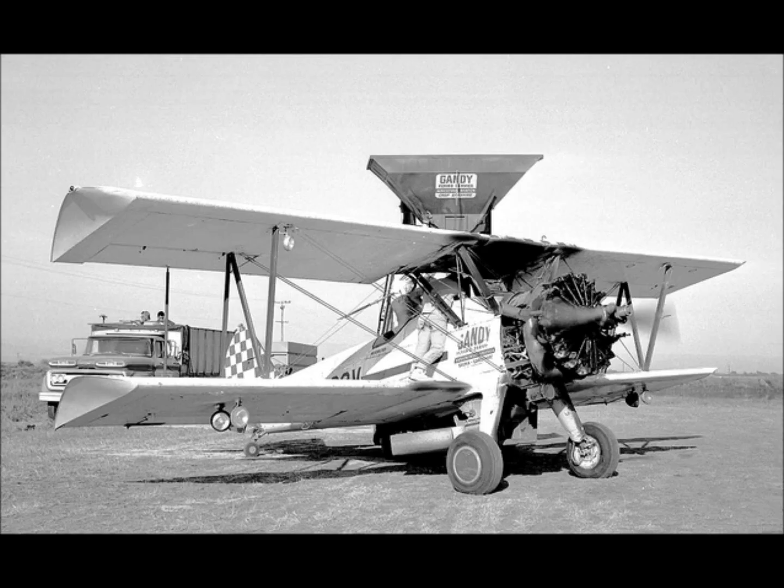Let me tell you more about the Ag-2 versus the first crop duster. The first crop duster was the Stearman, a biplane, a primary trainer in World War II. They were built by the thousands for the Navy and the Army, and at the end of World War II they were available for a small price—$1,000 you could buy one. And then they began to use the Stearman as an agricultural airplane.

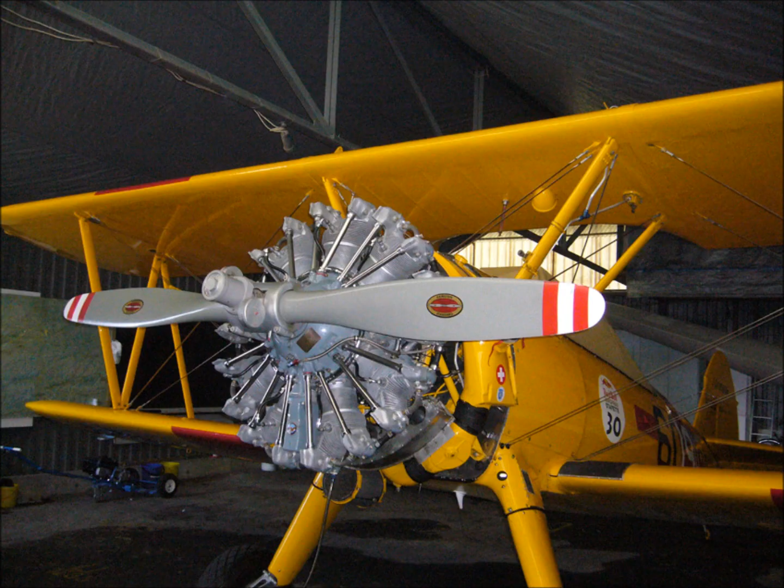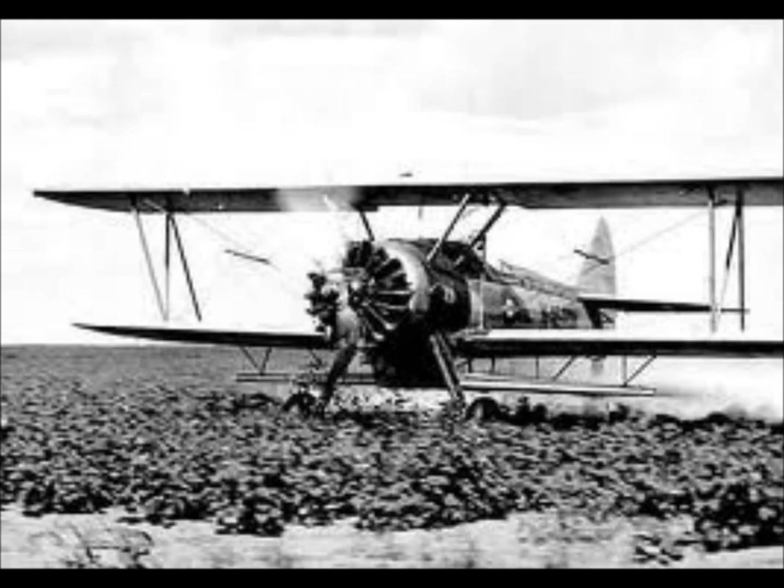They replaced the small engine with the Pratt & Whitney R985, which was used in the BT-13, another trainer in World War II. There were hundreds of these engines, so they got a cheap engine and a biplane that was acrobatic, and it was ideal for crop dusting, to start a crop dusting application company. But the Stearman was not designed for agriculture—it was designed as a primary trainer. So it was not the best, but it was the cheapest.

The Ag-2, on the other hand, was designed specifically for agriculture. And we can justify the different things that were selected in the primary design, because we were trying to come up with a product specifically useful for agriculture.

Now, the original work was done in Texas under Professor Weick, and they built an airplane called the AG-1. The AG-1 was an experimental airplane. It had the same platform and the same size as the Ag-2, of which I became a partial designer. The AG-1 performed very well, and the characteristics were as follows.

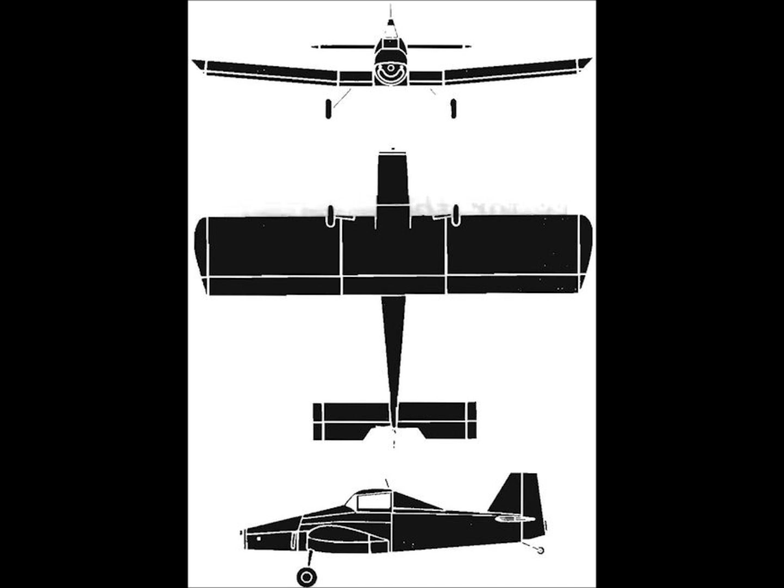By having a thick airfoil like the NACA 64021, you had a very smooth stall. That meant you didn't have a sharp stall like you have, for instance, in a primary trainer like the Stearman, which has an airfoil about 12% thick and would have a sharp stall. So the thick wing is better—you have better control during the stall. There are other reasons for having a wing like that.

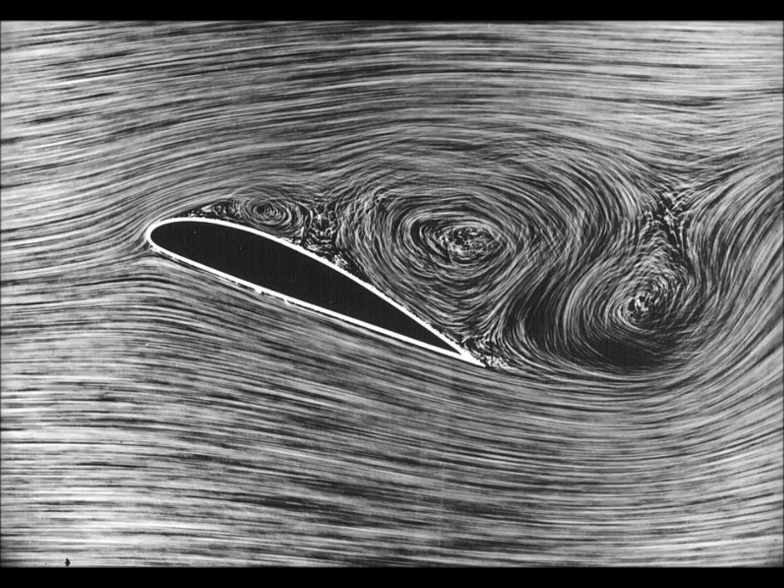I'd like to say some things about stalling. Most people have a technical reference on what a stall is, but I want to put it in my own words. A stall is an interruption of the airflow over the top of the wing, but it doesn't occur at the same time everywhere. In other words, if you have a rectangular wing, possibly the stall occurs by having an interruption of the airflow close to the root of the wing. If you have a trainer with a tapered wing—

Then the stall occurs where the ailerons are. You need the ailerons for lateral control of the airplane, which is not a good idea, so you have to put twist on the wing. Well, all those things come into play.

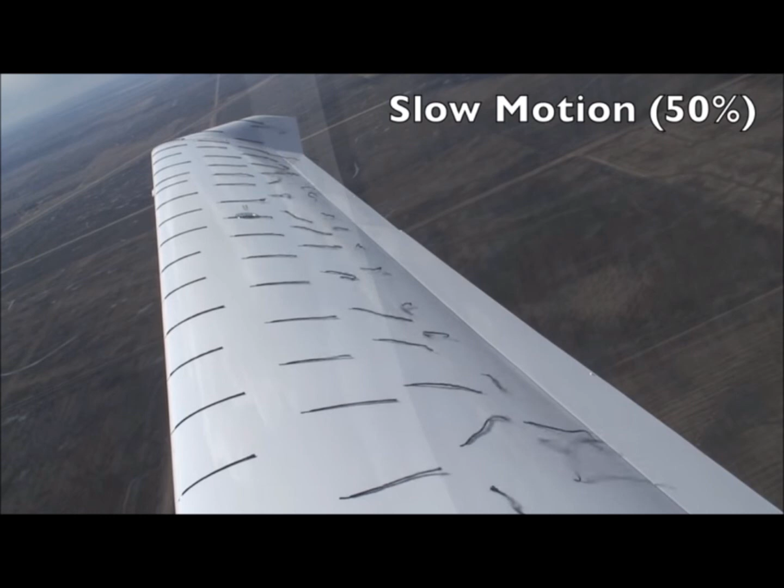If you want to design a crop duster and you're flying, say, 80 miles an hour, and you get to the end of the field and want to make a turn, you don't want to make a turn like you see at the airport, where the airplane banks slightly and makes a turn. What you want to do is make a very sharp turn with the airplane half stalled, and come back pretty close in line with where you started from. That's called the crop duster turn, and it's dangerous, but at the same time it saves time.

And the agricultural pilots get good at it. The Stearman is an acrobatic airplane, so it can take it. And the Stearman has a light wing loading, so it works out okay.

Now, that's a fact. The Ag-2 is primarily designed to make a turn in the stall, in the semi-stall condition, where the flow gets interrupted, with an airfoil that is gentle, so you don't have a very sharp drop in the lift. It had slots and other devices for good lateral control, like spoilers. You could make a very safe crop duster turn with a bigger airplane.

Well, that's essentially the story of the Ag-2. It was bigger than the Stearman. Roughly it goes as follows: the Stearman was an airplane designed with an engine of about 300 horsepower. Later on, they put the R985 on it because they were able to get it cheap from the basic trainers, the BT-13. That was about the maximum size engine you could put on a Stearman airframe. A bigger engine, and you had trouble.

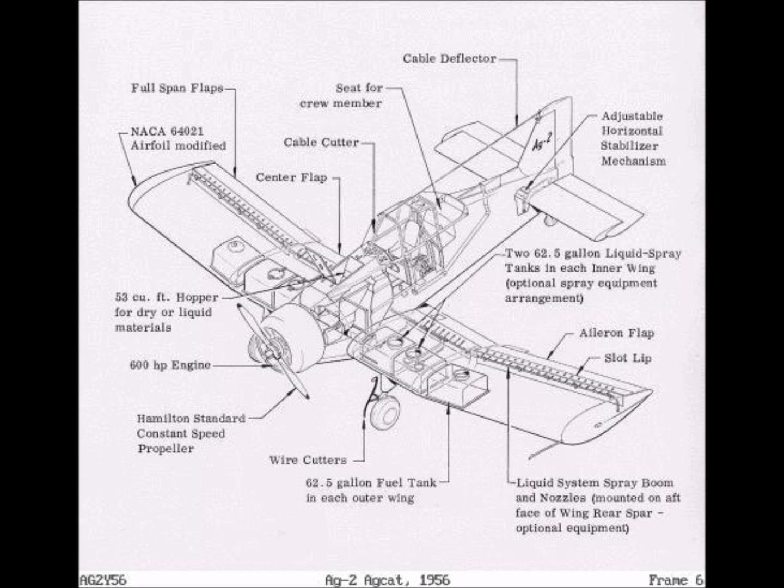The Ag-2, on the other hand, we were able to put a bigger engine on, the R985, the 450. We went to the R1340 that came from the T6 Texan, and it was double the capacity. It had a gross weight of 6,000 pounds, so it could carry more payload, more fertilizer, and that made it more efficient because you wouldn't have to be loading it so often.

That's the first thing. Also, the wing loading on the Ag-2 was greater than on the Stearman, which meant there was more downwash, more penetration of the grain or liquid fertilizer into the ground. So all those things versus very good control through a stall turn.

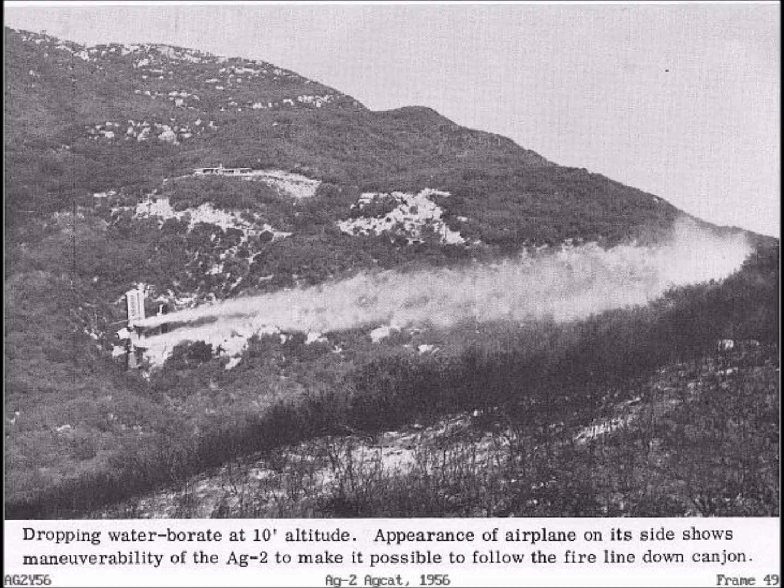Now, remember, I said that wings don't stall all at once. When you say a wing is stalled, it's because there are portions of the airflow on the top of the wing where the flow separates. So in the Ag-2, on a stall turn, the wing wouldn't be stalled everywhere, so you would have good control and you could make a crop duster turn.

What else? The history of the plane as it was being developed and the economics. Okay, the key thing, now I'm going to talk about the money situation. I would like to tell you that when I started working on the Ag-2, I was just an engineer right out of school, and I didn't know anything about agricultural aviation. But working with George Wing, the Transland Company, and the many years I was there, I learned a lot. Now, this is what I learned.

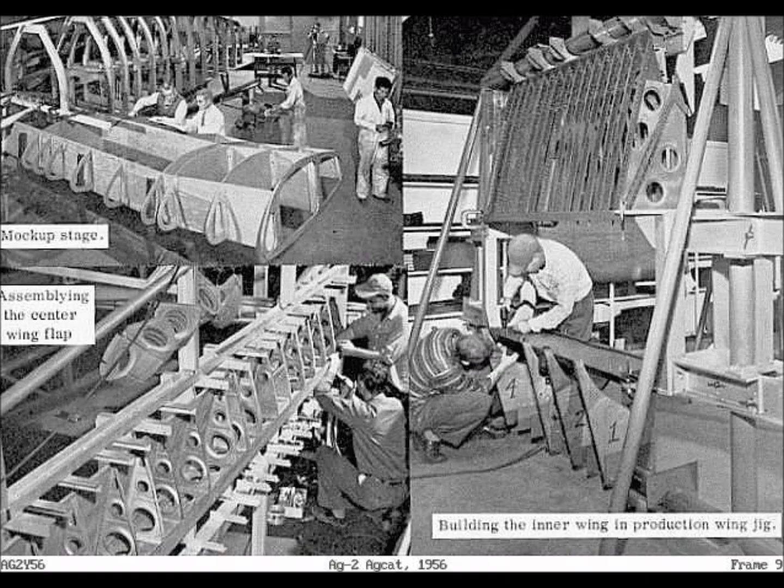At the end of World War II, there was a shortage of food in many places around the world. For the first time, people began to use fertilizer and apply it with airplanes, because airplanes became cheap by adopting basic trainers from World War II, modifying and changing them, all kinds of airplanes. They began to use them for agriculture, and they began to use DDT, and the production of food increased.

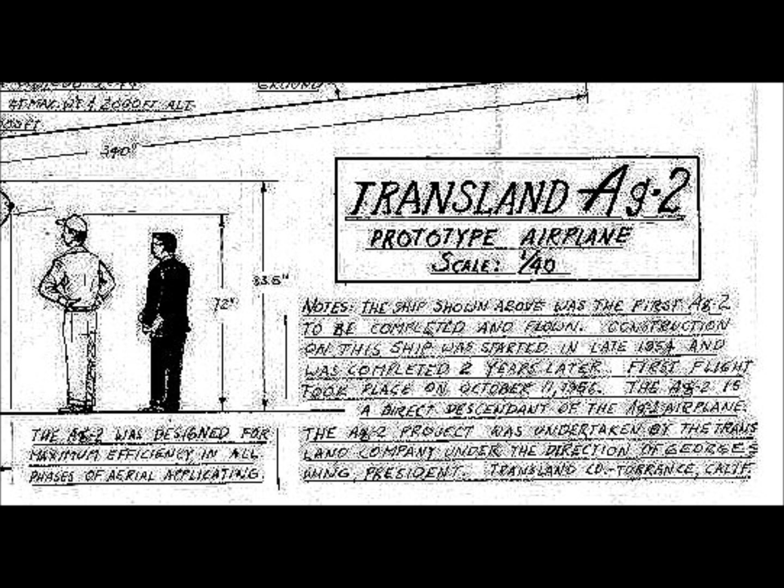I'll give you an example. In 1949, when I immigrated to the United States as a foreign student, Mexico didn't produce enough food to feed itself. Actually, at the end of World War II, that's the way conditions were - Mexico imported food. By the middle of the 1950s, the agricultural production of Mexico was four times as much, and it was exporting food, all because they began to use fertilizers and airplanes.

And so it was all around the world. As a matter of fact, when we started designing the Ag-2, it looked like we were going to sell many, many of those airplanes. Remember, the Ag-2 was started about 1954, and it began to fly for the first time in '56. DDT and agricultural aviation was expanding at full swing.

What else can I say about that? Later on, people found out that DDT had unfavorable effects, and that put a big crunch on the expansion of the industry, and the Ag-2 just came too late. What else?

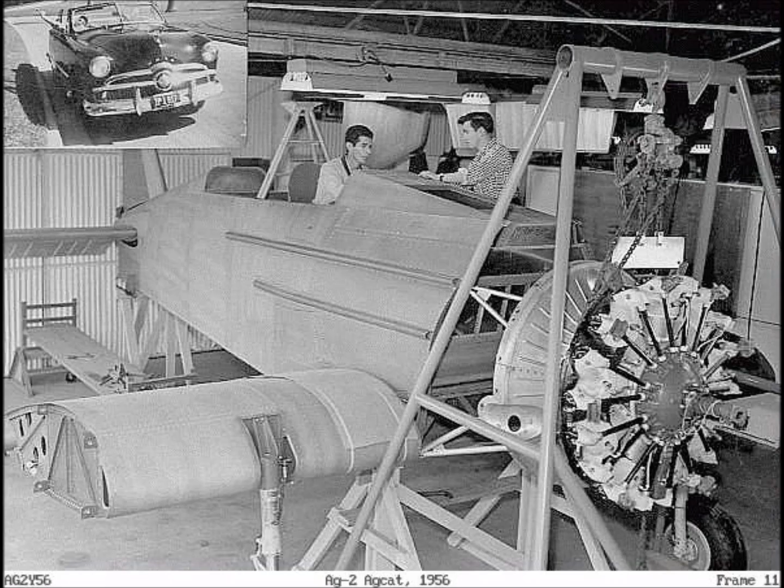Did you mention why it had a bigger engine? Oh well, the engine is an important aspect. You need it to make a good agricultural airplane. You don't want a very fast airplane. You want essentially a slow airplane, very forgiving, and you want good control in turns so that you can make that crop duster sharp turn where the wing is half stalled.

The key thing is that you want an airplane that is aerobatic, that can take the G's on a turn. You want an airplane that is not very fast, so you want a light wing loading. You don't want a wing loading of 30 or 40 pounds per square foot. You want something like about 15 or 20, of that order.

I think the Ag-2 was a heavier airplane, with a wing of 321 square feet and a weight of 6,000 pounds. You take 6,000 divided by that, it was about 20 pounds per square foot, which was heavy for a crop duster.

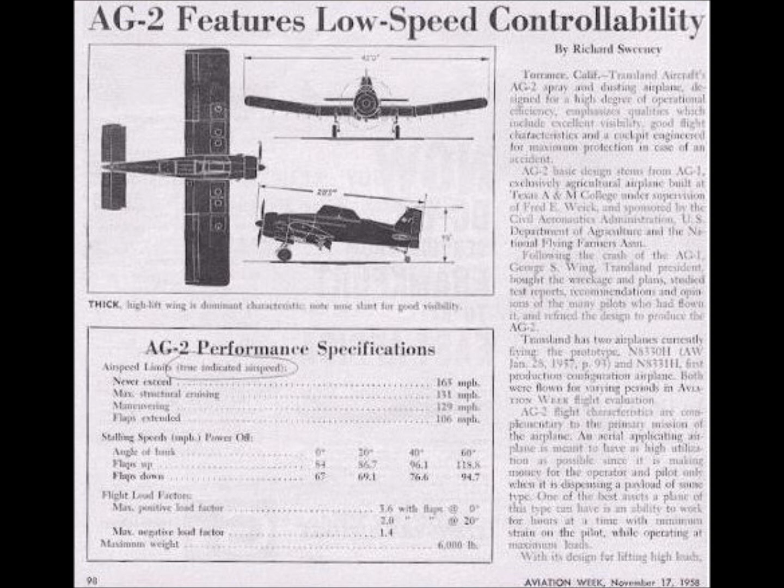About the engine, the engine of choice in the beginning were small horsepower engines. The crop duster of choice was the Stearman. The Stearman came up with the Jacobs, or an equivalent engine of about 300 horsepower, 320, 350, something like that.

When they started using it as a crop duster, you make more money, you carry more payload. So they went to a bigger engine, and the Pratt & Whitney R985 became available. Those engines came from the BT-13 primary trainers, and they were very cheap. The marriage of the R985 with the Stearman is what made the Stearman an ideal crop duster. It was cheap, it had enough power, it didn't stall, it had good characteristics doing the stall, and it fulfilled the slot very well.

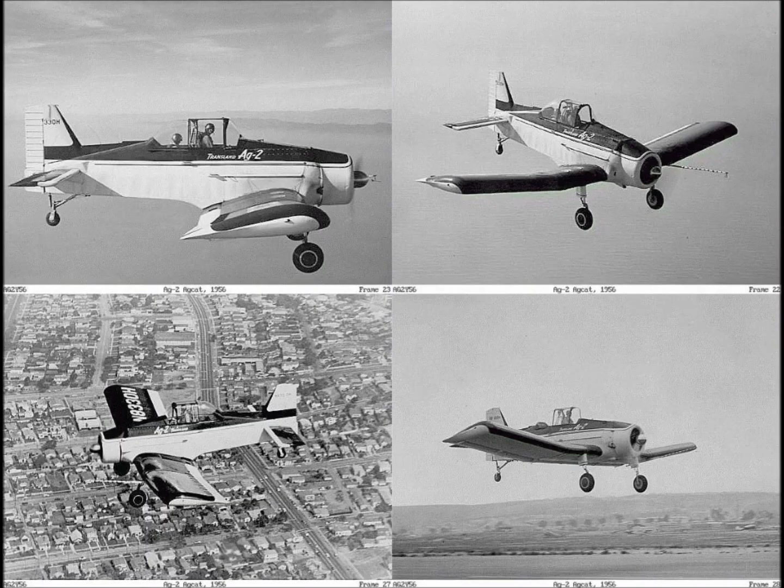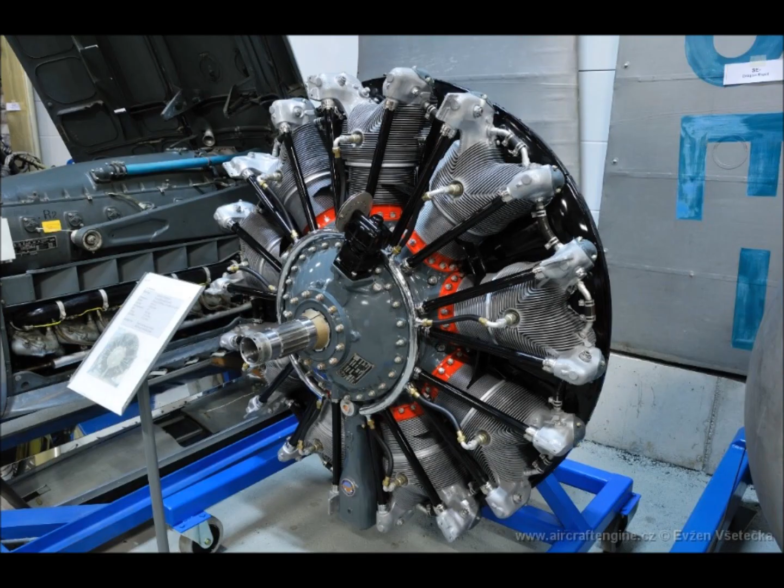Later on, when we were designing the Ag-2, from the Ag-1, we went to the R985, the engine of choice. But then the engines became more scarce because more crop dusting pilots were using the R985, the 450 horsepower engine. So we went to the R1340, the 600 horsepower engine. They were cheaper than the R985, and it made the Ag-2 perform much better.

Now, if you go into bigger engines, you have to go to much faster airplanes, and then they're not suitable for crop dusting. Could you put an R1340 on a Stearman? No, no way, it'll tear it apart. That's 600 horsepower - 450 was the maximum. You put a bigger engine, and you can't even land it. I'm sure some pilots tried it, but that's a big, heavy engine.

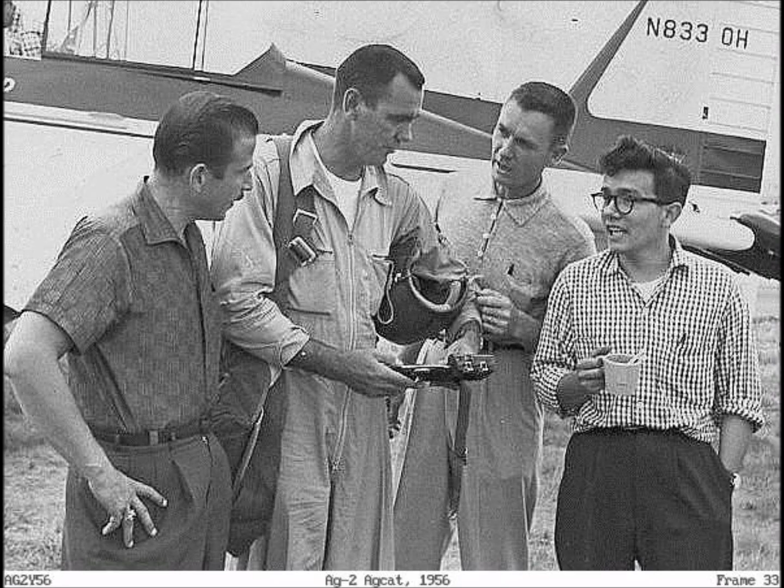Okay, I was going to ask, did you want to talk about George Wing?

Well, if you ask me, the interesting thing about it is the different people that work in agricultural aviation. I don't know all of them. I know only the ones that worked with the George Wing company, the Transland company. I could talk about George Wing.

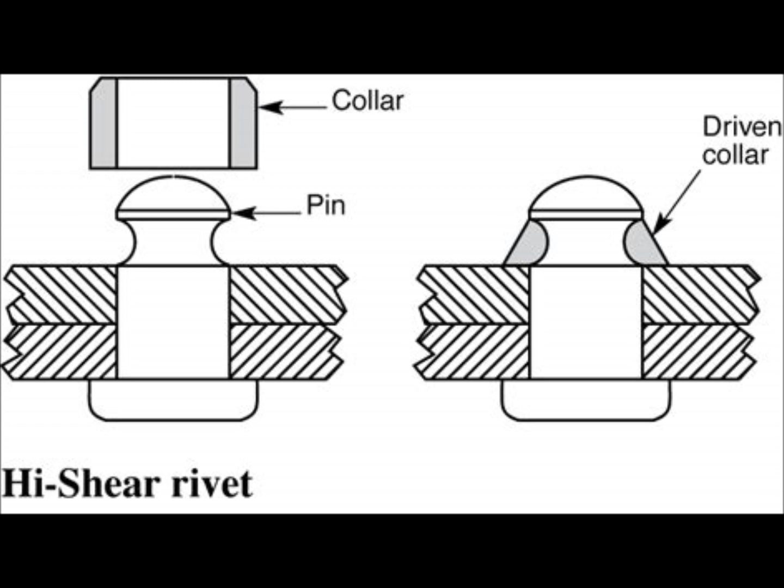George Wing started at North American as an engineer. He invented the Hi-Shear rivet, which I'll explain on another occasion. The high shear rivet became the primary choice rivet for highly stressed parts in airplanes during World War II, and that's what put George in business building high shear rivets for North American and then for the whole industry. That was the base, that was the money maker.

George Wing always wanted to be an airplane designer. That was his ideal, and he wanted to get into aviation. That's the way he got into agricultural aviation.

One branch of the Hi-Shear Corporation was the Transland Company, which specialized in all kinds of accessories for agricultural aviation - for Stearmans. Everything from the hoppers to carry solids to the liquid delivery systems and so on for the Stearmans were built by the Transland Corporation.

The Transland Corporation became the company that sponsored the building of the Ag-2 under George Wing's direction. He wanted to be an airplane designer like Donald Douglas or some of the other people. So he bought the rights to build the Ag-1 from Fred Weick at Texas A&M. That was the prototype of the Ag-2, an airplane designed for agricultural aviation in an agricultural college in the United States. And it was a terrific airplane.

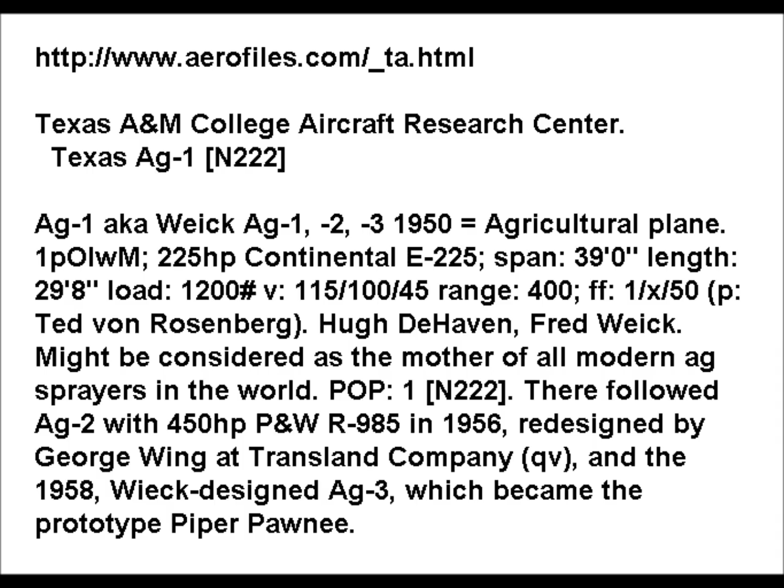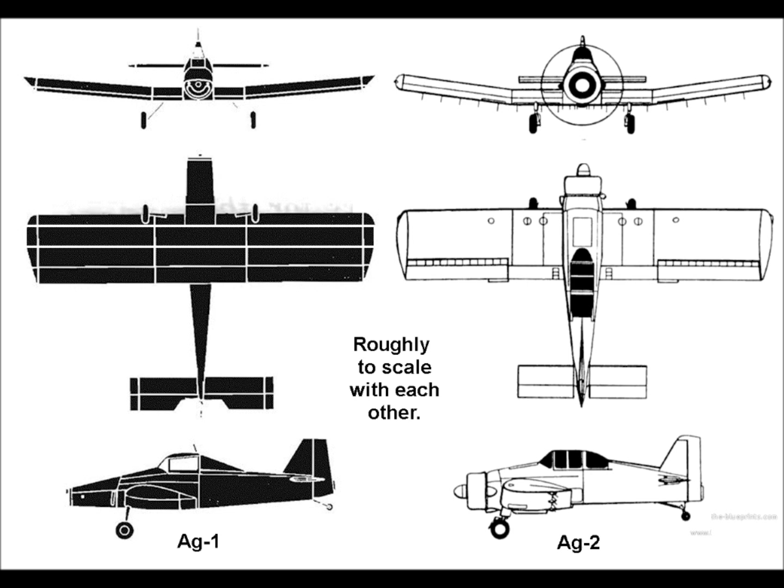How much did the AG-1 and AG-2 share in terms of engineering? Aerodynamics, 100%. But from the construction and stress analysis, everything else was different. The AG-2 was a bigger airplane, and it was certified by the FAA, which had requirements for regular airplanes. The AG-1 was an experimental airplane, never put into production. We built the AG-2 so we could manufacture thousands of them.

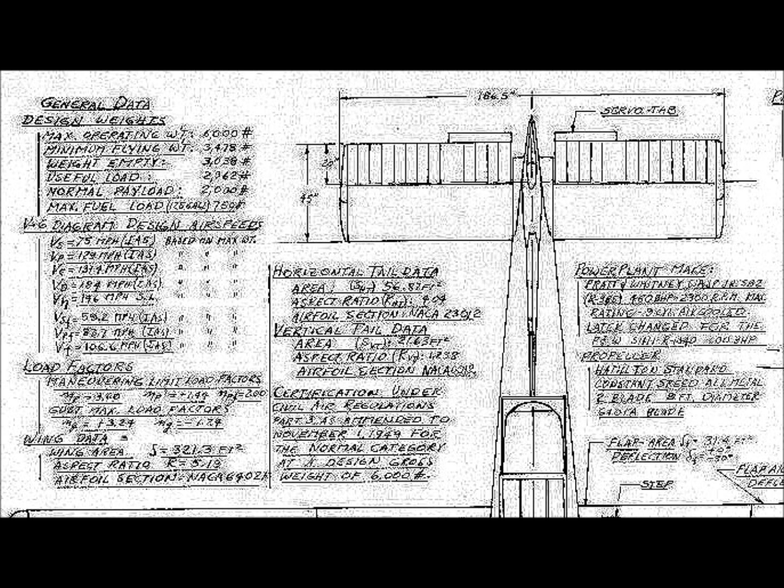When you did the AG-2 as a prototype, what did you estimate its cost of production was in the 1950s? I was not in the loop on pricing, but building one of the prototypes probably cost $250,000. Just the engineering cost over the 4 years it took to build the AG-2, we spent about 20,000 man hours. I was an engineer myself, and I estimate I put about 4,000 man hours on that airplane. So it was expensive. The predicted price for the AG-2 was about $50,000.

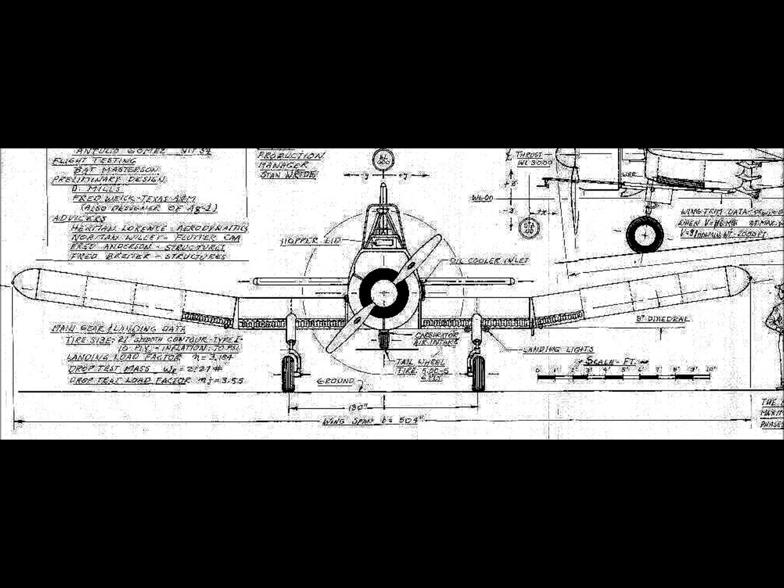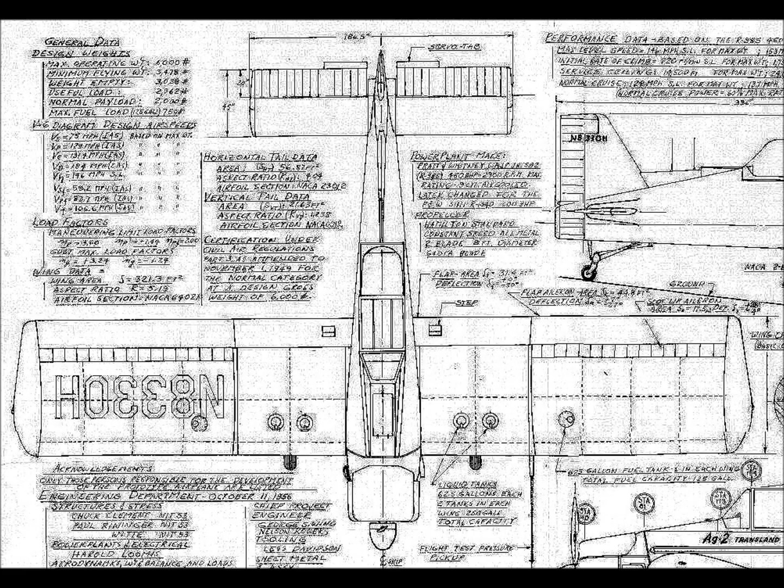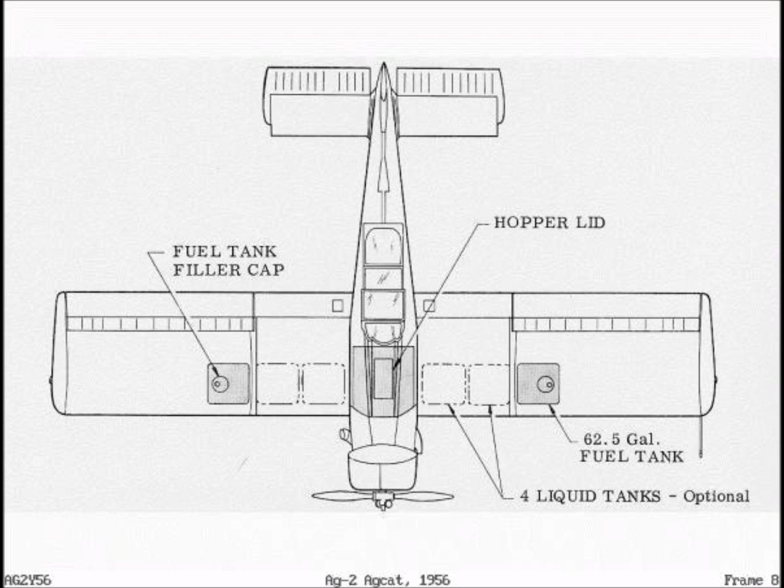Let me back up. In the beginning, a Stearman you could get for about $1,000, but that was in 1946, '47. By the end of the 1950s, the price of a Stearman would be about $10,000 or $15,000. So the idea was that you could actually get an AG-2 for say $30,000 — that was the target when we started building it. By the time we finished, we were thinking more like $40,000 a copy. But at that time, a good Stearman was more than $10,000, and they weren't enough. The agricultural aviation business was expanding full blast all around the world.

If you took a Stearman side by side with an AG-2, what would be the comparison in terms of crop coverage? If you look at the two airplanes side by side, you could see the AG-2 was bigger, but not exceptionally, not much larger. The length of the airplanes was comparable, but the span of the AG-2 was a great deal more — you could see it right off the bat in photographs. The AG-2 was an all-metal airplane, while the Stearman was a fabric-covered biplane that came from much older technology.

I can't say which is the better airplane. I think the Stearmans were beginning to disappear from crack-ups and use, and something had to come in and take over. The Stearmans were becoming scarce — you couldn't get another one, they weren't plentiful like they were in the '40s. By the end of the 1950s, the price of a Stearman was high, but you couldn't find one. People were flying with spare parts, literally.

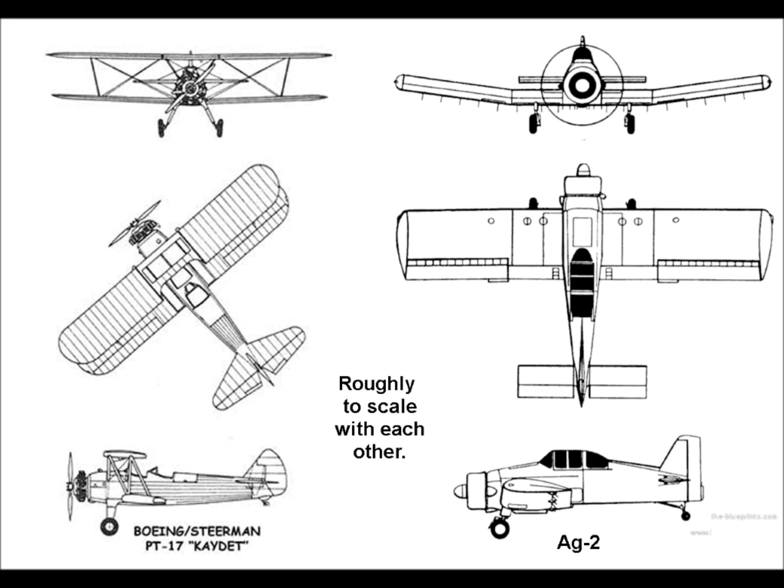Another question — you mentioned another airplane company. Yes, Grumman. Grumman took advantage of it and came up with what they called the Ag Cat, which is almost a copy of the AG-2, except a little smaller, using the R985 engine. If you look at the two, they look very much alike. They made two planes, a biplane and a monoplane, and they copied a lot of the AG-1 and AG-2. Grumman is an excellent company — they didn't need help from us — but they did a good job.

Grumman could go into production on the Ag Cat, but we couldn't. Grumman had the benefit of building airplanes for the Navy, and they had plenty of money in the bank. We didn't find the financing needed to put the AG-2 into full production, even though that's what we decided on. So eventually Grumman outlasted us and outproduced us.

One of the things you said is that by solving the same problem, you kind of ended up with similar airplanes. Is that true? The airplanes look very similar, and the way you fly agricultural aviation hasn't changed.

The key thing in agriculture is that you go on a field and you follow the crop, and when you get to the end, you have to make a very sharp turn and come back, almost in a lane parallel to it. So here's the problem: how are you going to do it? You could go ahead, make a pass, make a long run all around, and then come back on the other side and make parallel passes.

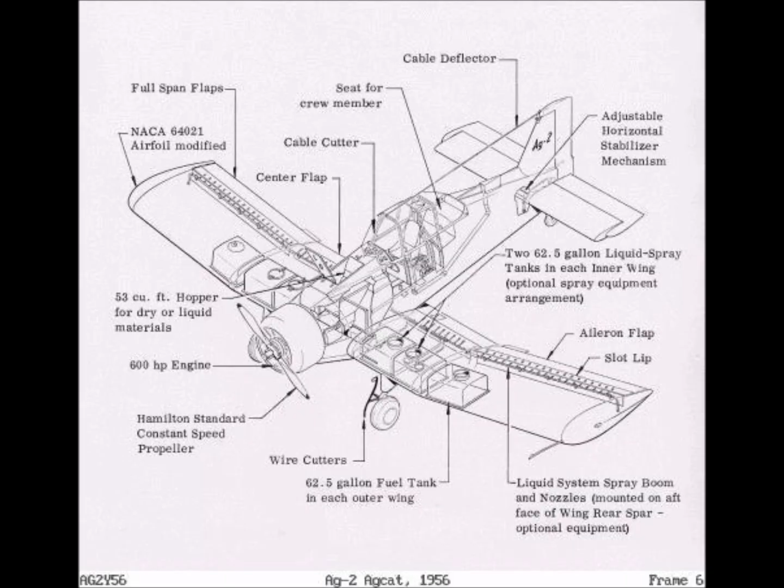So you're never going to get the entire wing stall at the same time. So when we say the wing stalls, it means we lost lift, but we don't mean that we lost 100% of the lift. And that's where the airfoil becomes important.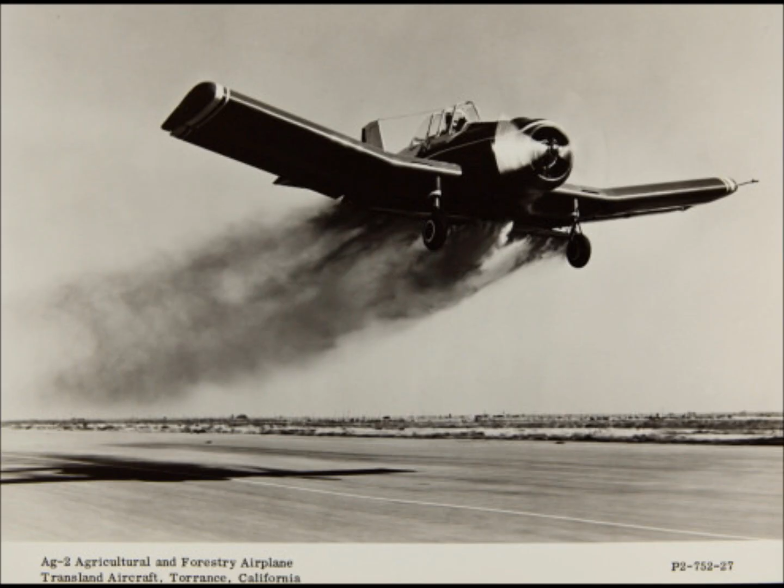If you have a wing airfoil like the NACA 64021, it has a very gentle stall. It's not a sharp thing. So that means you could have parts of the wing stalled, but it's gentle, and you increase the control during the stall, and that's what you need in order to maneuver the airplane and recuperate and come out of the stall flying and not crashing.

So another question I had is, what did you think when you found out that the original prototype still exists? You mean the AG2? Yeah.

Look, I like to tell a story. That prototype, I walked around that airplane many times while it was being built. One of the tasks I had was to do the weight and balance. That meant that I calculated the weight of every nut and bolt and everything for that airplane. And as it was being built, I went and updated a file so that at any given time I could calculate the CG of the airplane as it was being completed.

The whole idea was that we had bounds. With the CG, as we were building it, when it went out of those bounds, we immediately had to take drastic action to make it come back the way it was supposed to be. Otherwise, the airplane wouldn't fly properly. So that meant that I knew every part of the airplane, so that's the first thing.

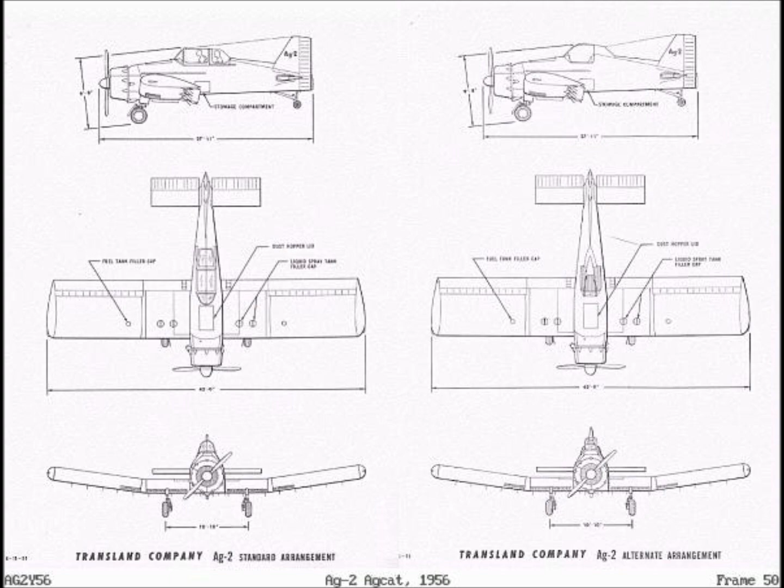Two of the Ag-2s that were built afterwards crashed. So I never thought that. I always thought that airplane was lost. What else can I say? I have pictures of it. Maybe you can see a picture of me working with one of the mechanics by the engine and so on.

Yeah. Can I tell a joke? Yeah. Since I was doing the weight and balance on the airplane, every time a component came out of the jig, say a wing panel, a rudder, a flap, there was a prediction of what the weight of the whole component would be, and we had a raffle.

Well, one of the main panels, the outer panels of the wing, one of the heaviest ones, was coming out of the jig, and everybody made a guess of what the weight should be. My guess was my calculated value of how much that panel was going to be. I kind of forget what it was, but say I made a number, 211 pounds for this big wing panel. That's my calculated weight, and everybody else guessed different things. We'd take it out and then we would weigh it. Whoever got the closest one would win a pot of gold or something, anyway it was a lot of fun.

When that big wing panel came out of the jig and they weighed it, it was heavier, over 40 pounds heavier. Now that meant curtains for me. I was a young engineer. I couldn't understand how I could have missed the weight by that much. I was hoping I would miss it by maybe half a pound or something like that. So I was very much alarmed, and I went running back to the office, right next to where they were building the airplane, looking at my figures to see what the heck happened.

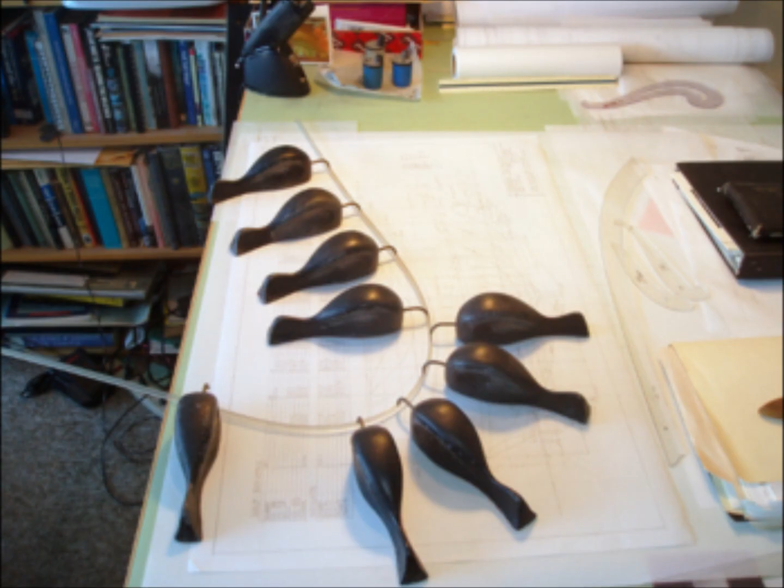I could not find any reason why my calculations were that off. So I came back apologetic, worried that maybe I'd lose my job as an engineer. And everybody began to laugh, including my boss. Well, I knew there was something wrong somewhere. Then I found out that, unknown to me, the loft group had some lead ducks. The lead ducks were used to make counterweights on the drafting table with plastic rulers that bend so you could make curves. They took the ducks, put them inside the wing, took the wing out, and they were having a big laugh on me.

That I remember. I also remember one day at approximately 1 or 2 a.m. — I had come back from work about 8 or 9 p.m. and was sleeping — I got a call from Loomis. I'll tell you who Loomis was later. But one of the workers there, the power plant group, called me and said, Tony, we got it out, it's all put together now.

So I rushed and got into my clothes, jumped into the car, and about 4 a.m. I rushed down to Torrance, where they had a big hangar with our buildings and materials, and there was the Ag-2 all put together. Not every bolt was properly tightened, but the whole thing was together, and we had never seen it. It was very, very nice.